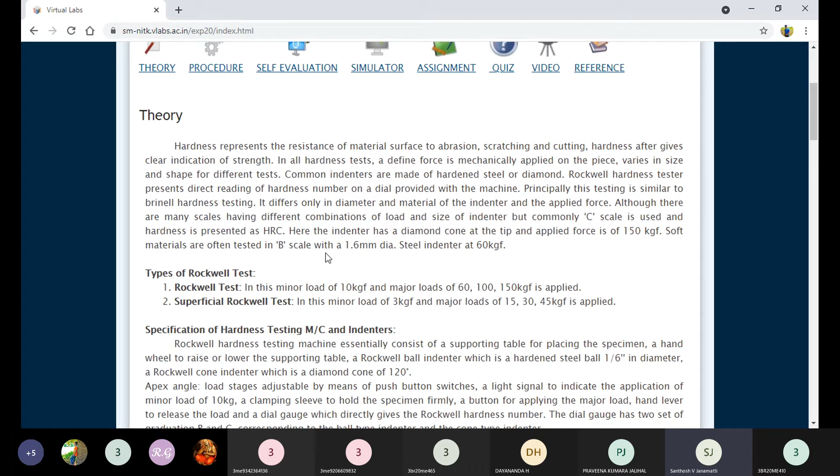Yesterday I defined hardness as the ability of the material to resist indentation or penetration, in other words, the ability to resist scratching, cutting, or flaws on the surface. If a material is very hard, it will not allow easy scratches, penetration, or indentation on the surface. Hence we call it a hard material.

The best examples for hard materials are stainless steel, 18-8 steel, and high speed steels. Some other harder materials are there too. For example, some ceramic materials have excellent hardness properties. So all these are examples of hardness materials.

Be careful, note this in your book, this is very important for the Viva. You can give examples of hard materials. Most ceramic materials are best examples for hardness, such as aluminum oxide, boron, tungsten carbide, boron carbide, and cuprous oxide.

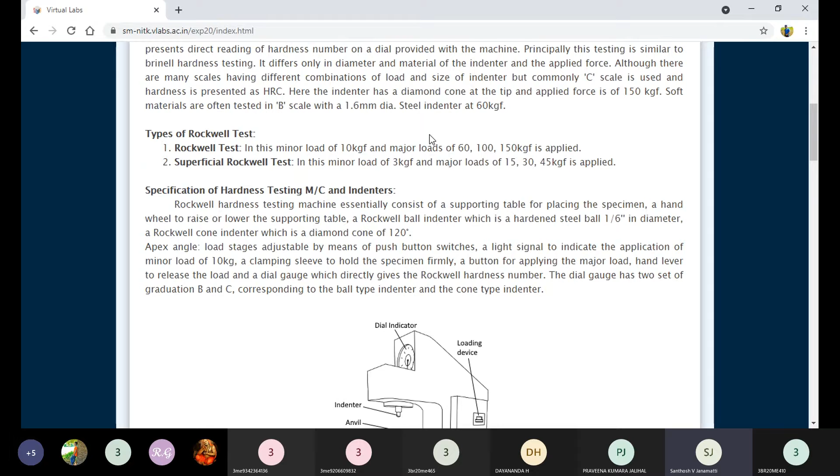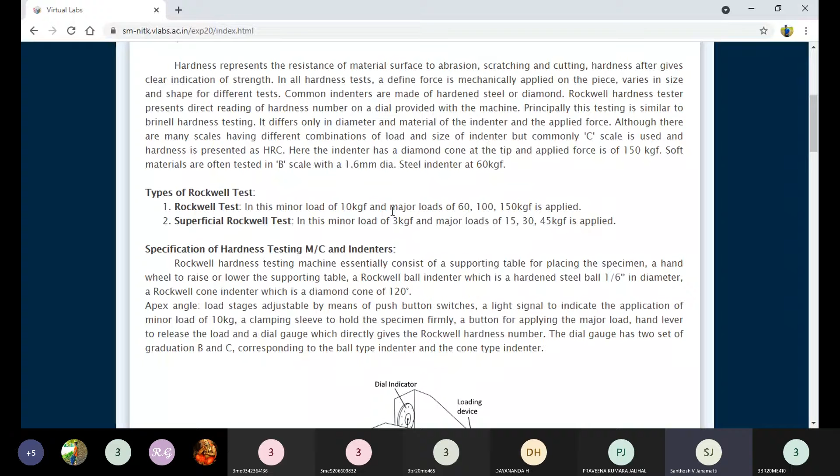Today we are planning to conduct one experiment, so while discussing the procedure, I will explain everything - what will be the minor load, what is the major load, and everything we will discuss.

So the specifications of this, we can call it our Rockwell hardness machine. As we can see, the image is a Rockwell hardness machine. Here we have a chart. This is a very important thing. Now I am focusing on these scales.

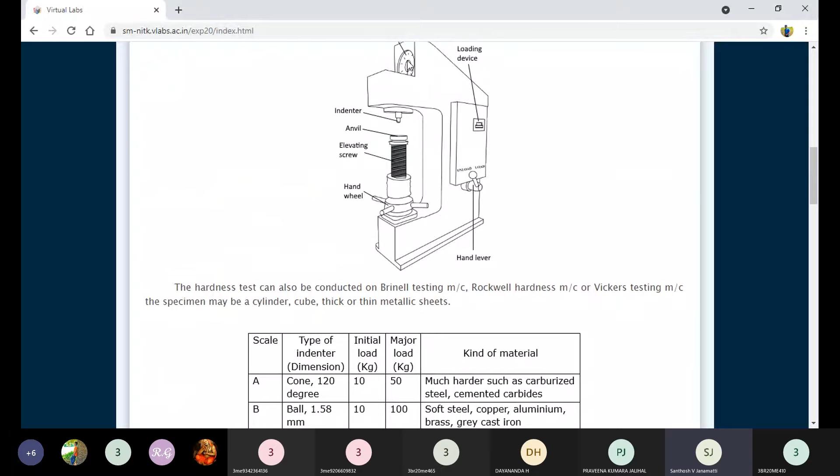So here we have a dial indicator, keep this in mind, while discussing the procedure this will be very important. Meanwhile we should understand this, it will be important in future. In this dial indicator there are three scales: A scale, B scale, and C scale.

So what do they indicate? There are three different scales in the dial indicator. If the A scale is selected, A indicates the type of indenter - meaning the dimension of the indenter based upon the material. So here I will go one by one.

So for the A scale, A indicates the dimension or type of indenter, and it also indicates the load - both minor load and major load - for that particular kind of material. A specifies these types of materials.

Which materials are those? Much harder materials, such as carburized steel and cemented carbides, as well as some ceramic materials. If you want to determine the hardness value of carbide materials, you should focus only on scale A, because this dial has three different scales.

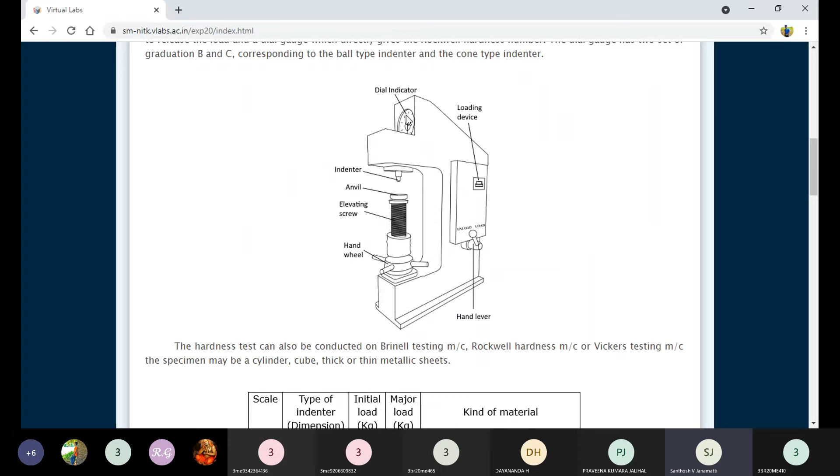If you are using carbide or harder materials, you need to take the type of indenter with respect to the material, because scale A indicates a cone type indenter, or sometimes diamond type indenter, with an apex angle of 120 degrees. The initial load, meaning minor load, should be 10 kg, and major load should be 50 kg. You have to follow all these parameters if your material is a harder material.

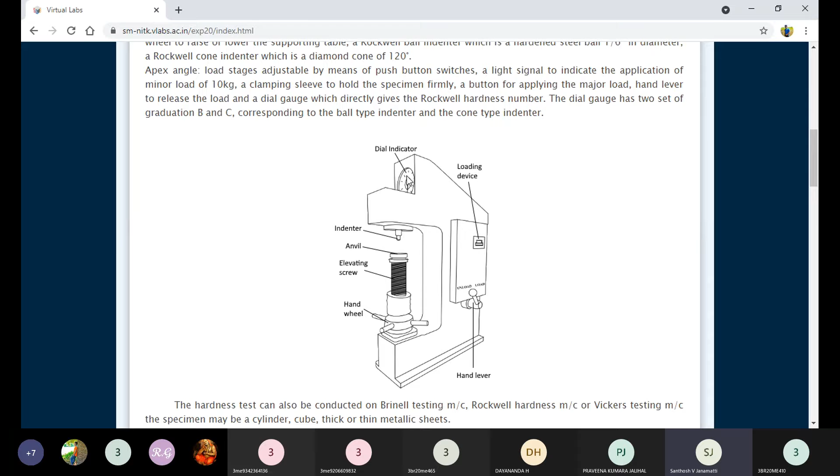You can note down the readings only for the scale present, whether it's A, B, or C. Least bother about the other scales. Your focus is only on that particular scale because of the material. Hope you understand—keep this in mind.

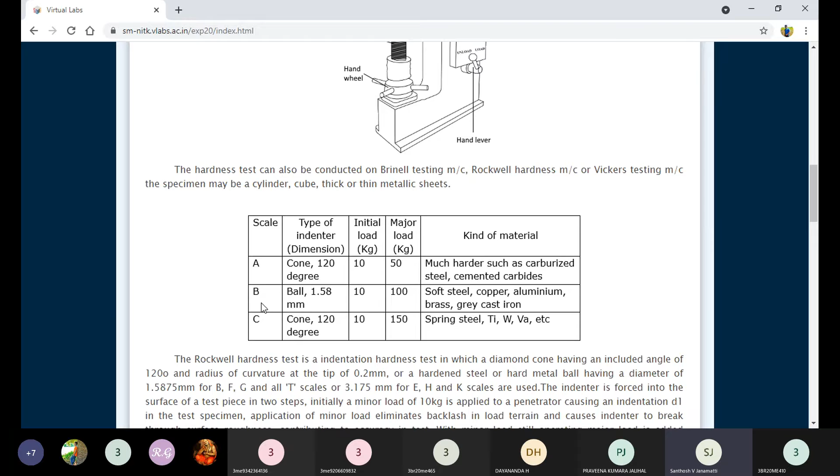Coming to the B scale—what does it indicate? B stands for Ball indenter, meaning the type of indenter is spherical in shape, unlike the cone or diamond type. The ball diameter will be approximately 1.58 mm, though sometimes we use 2 mm diameter balls for conducting the experiment. The initial load is 10 kg, but the major load is 100 kg.

What kind of materials can we use here? If you get aluminum, soft steel, copper, brass, or gray cast iron, all these are medium hard, ductile materials—most commonly these are ductile. These have medium strength, not very high, and are medium hard materials.

Hence for these materials we select the B scale. We use the ball indenter, with initial load of 10 kg force and major load of 100 kg force.

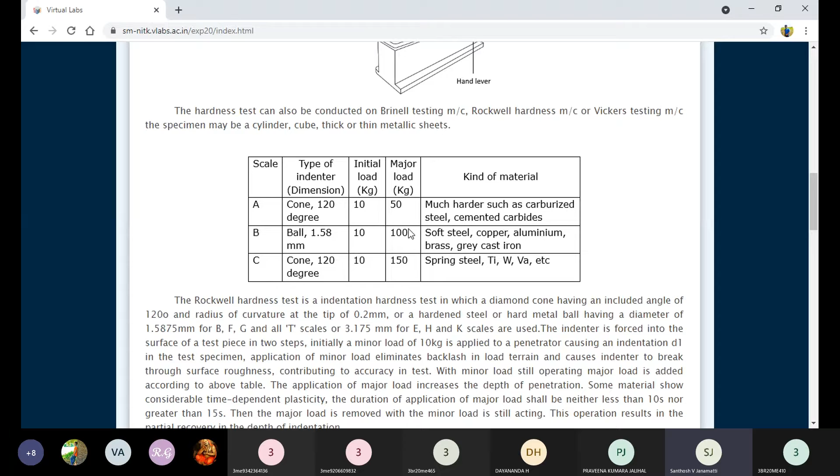Now coming to the C scale. The cone indenter has a 120 degree angle. The initial load is again 10 kg, but the major load is 150 kg.

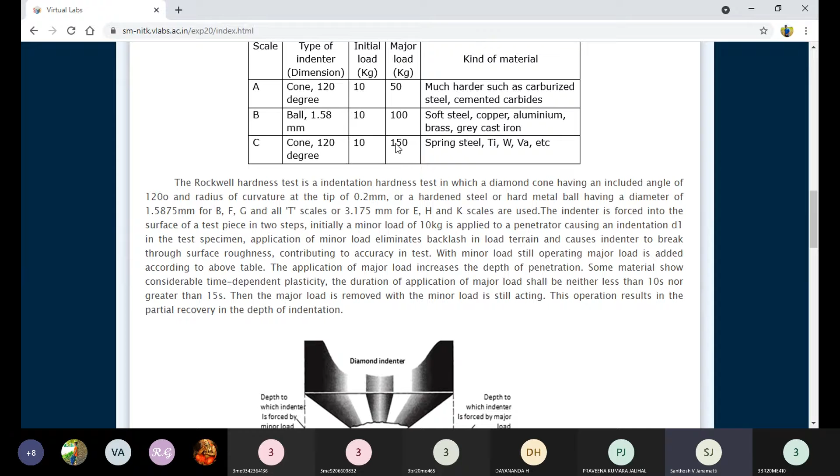What kind of materials do we use here? Much harder materials. Spring steel is one example—these are most commonly alloy steels, high carbon or high alloyed steel. Spring steel definitely has high strength and high hardness.

Other materials include titanium, tungsten, vanadium, and other alloying elements. If your steel or any other alloying material needs hardness determination, you go through the C scale.

This is very important basic information you should know while conducting this experiment. When sitting in front of examiners during vivas, such questions may arise, so you must have the capability to answer. I hope you understand these things.

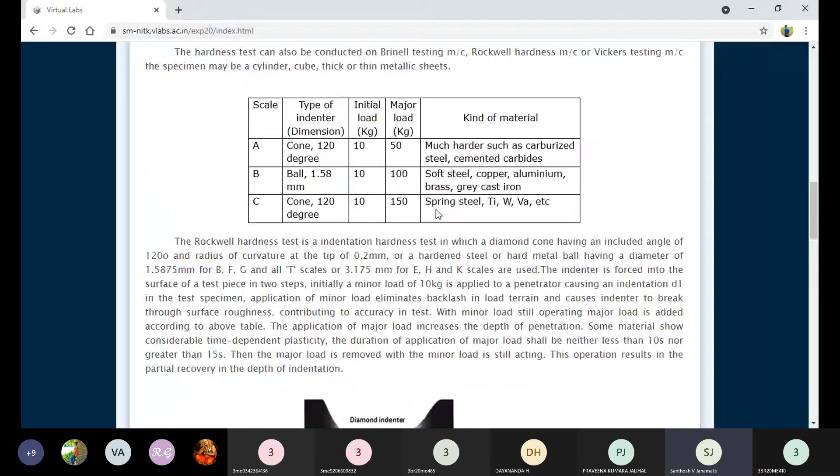Now I'll show you about the indenter. This is one kind of indenter—a cone type, or diamond shape indenter. We can call it a diamond shape indenter.

The minor load indents only up to a certain portion of the surface, just entering into the workpiece. Above and below there are two hash lines visible. The first hash layer is dug into the material when we apply the minor load.

The second hash portion occurs when we apply the major load. This is for understanding how the forces work—this is the first force and this is the second force.

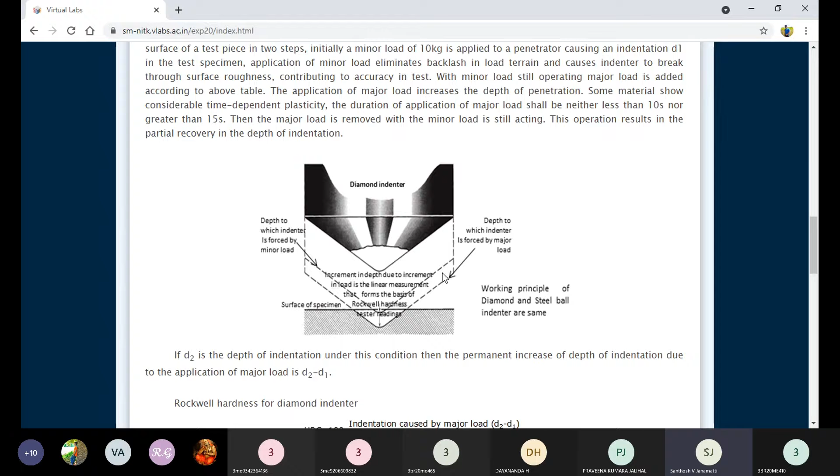With this force we compress or press the indenter into the workpiece until we get the indentation or print over that particular sample. Once we get a perfect impression on the workpiece, we stop and note down the reading. I will explain everything—so coming to that.

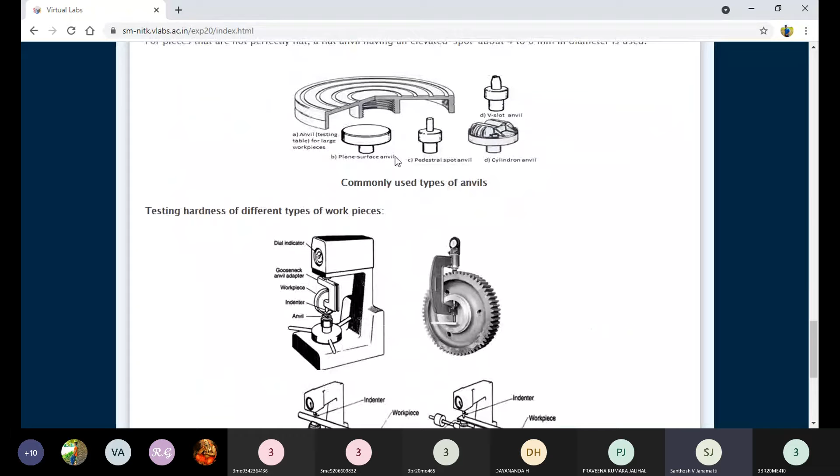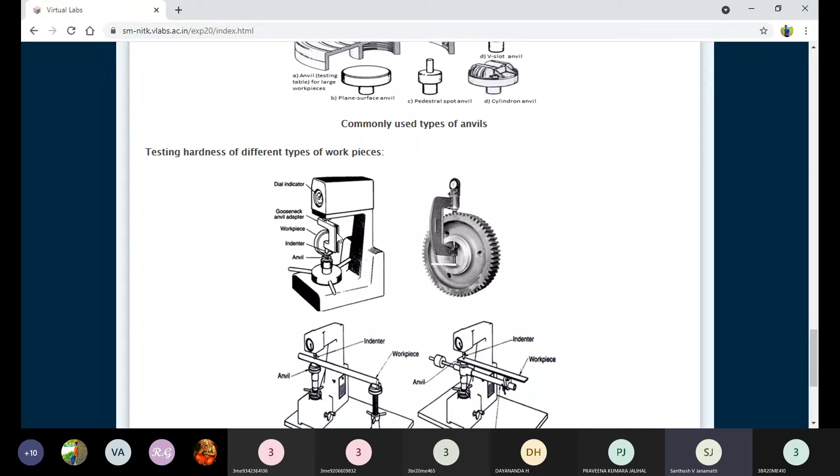This is the arrangement of your Rockwell hardness machine, and here we can see the different types of pieces, different dismantled parts, or different machine elements which combine together to form the machine.

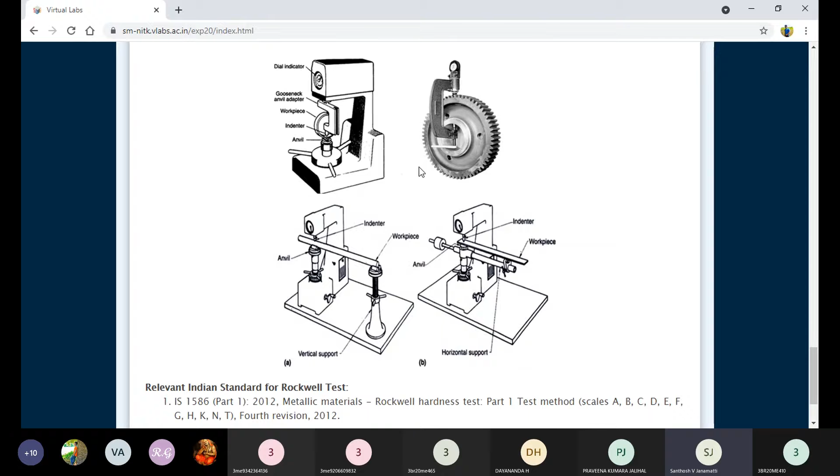So here we have different types of anvils. This is one type of the anvil. We can easily rotate this screw or screw handle to raise the anvil. This is one type, and this is another type. We can rotate this hand wheel to raise the anvil.

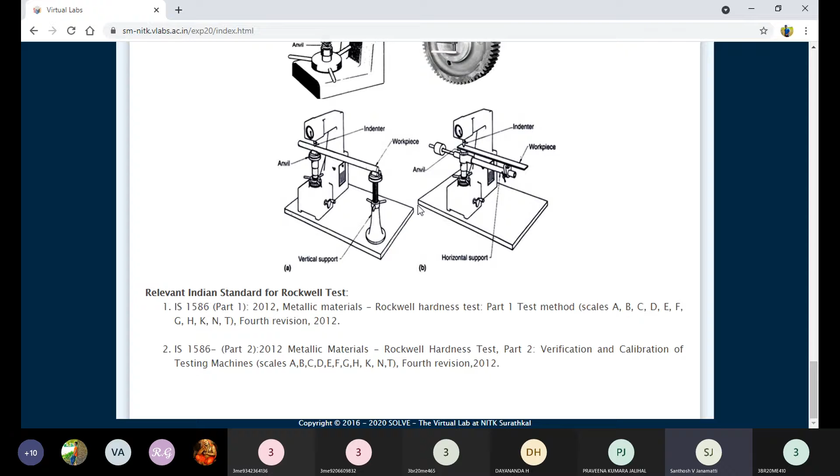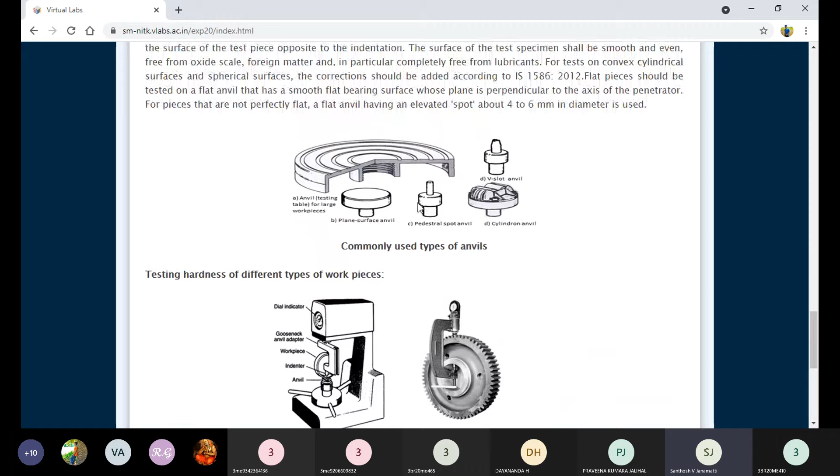This is one more type of the machine. There are different hand wheels or different anvils we can see here because of different applications and different situations. We can select these kinds of machines based on that, right? I hope you understand this. This is about all these things that come under the theory part.

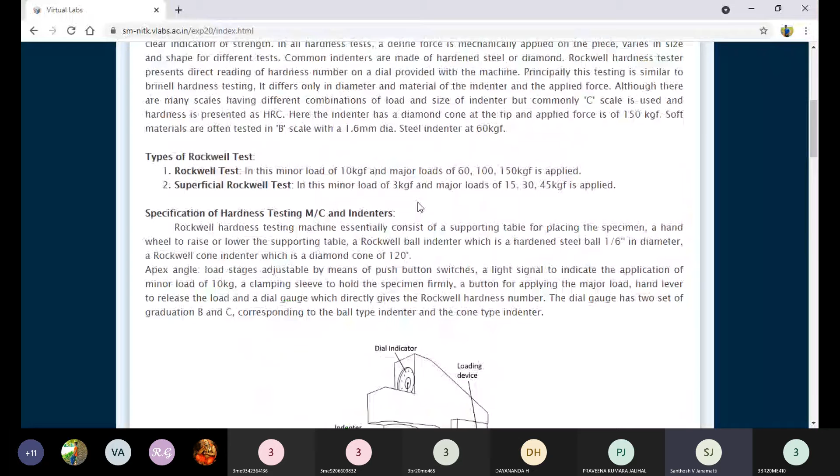Yes, any doubts? Shall we start the procedure? Shall we move? Hello, are you there? Yes.

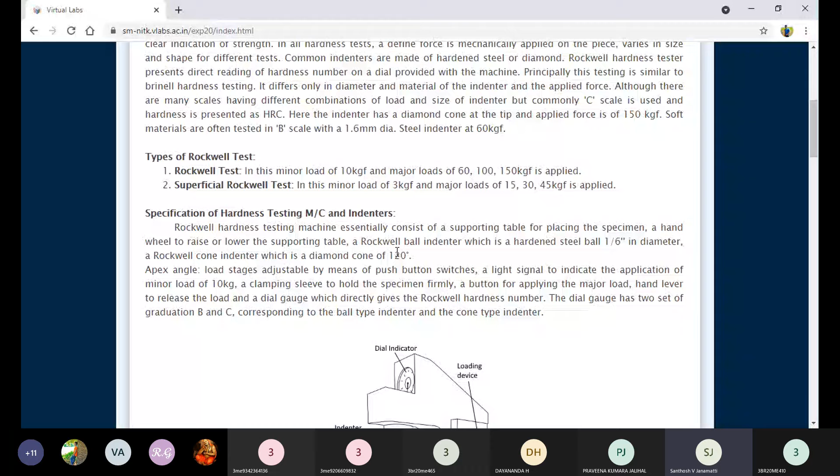Okay, this is only the theory part. Now we will focus on the procedure. The theory part is over. So the things we need to understand, I explained to you, so that it's better for understanding the experiment. Now I'm coming to the procedure.

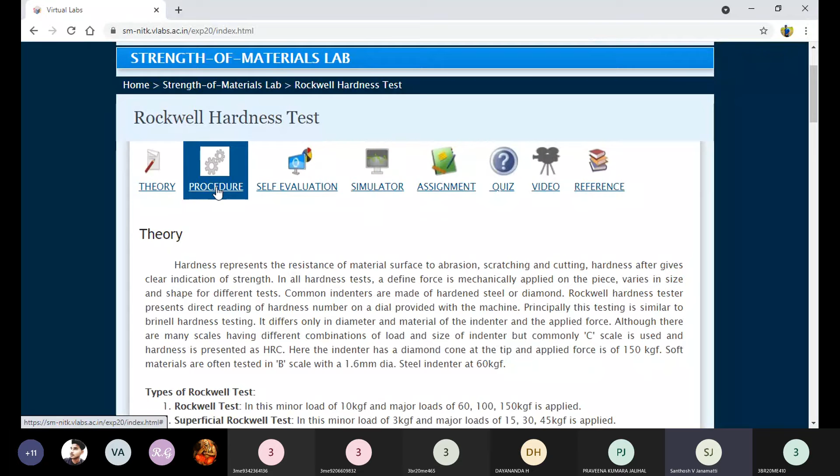See here, there is a procedure for how to conduct the hardness test. Aim - I will start from the aim. The aim is to find the Rockwell hardness number of mild steel, cast iron, brass, aluminum, and spring steel. So for any one of the materials, we need to determine the hardness value.

In other words, you can also say the aim is to determine the hardness number of the given sample. The given sample may sometimes be mild steel, cast iron, brass, aluminum, or spring steel. In practice lab, we take all these different kinds of materials, so we need practice with different samples. In the examination, out of these materials, you can get any one, and you need to perform the test on that particular selected material.

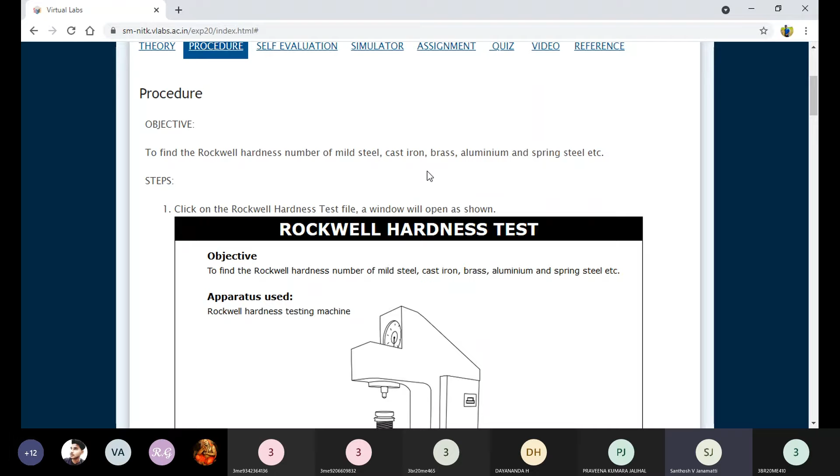This is the aim. Now, step one - I will show you what step one is. Okay, right.

Before going to step one, I will show you the machine. This is the apparatus, which we can call the Rockwell hardness testing machine. Here we have an anvil - this is the anvil. This is the hand lever, this is the screw, and this is the platform or anvil platform.

This is the hand wheel. Once we start rotating it clockwise, the screw will rise, and then it will touch the indenter. Here this is the indenter holder - this portion is the indenter holder. At the tip, we need to fix the indenter. This is the indenter holder, and this will be the indenter. The indenters have already been discussed - different types are available.

Based on the type of material, we need to select the indenter. Indenters are available in different shapes and dimensions. Depending on the material, sometimes it's a diamond shape, sometimes a ball shape. If it's diamond shaped, you look at their angles. If it's ball shaped, you look at their dimensions or diameters - 1.58, already discussed, or 2, sometimes 2.5 - these diameters are available. Based on the material, you can select.

You can fix it into the indenter holder, and this is the dial gauge. Here we have three different scales. This is the load unit - here we need to set the loads. Different loads are available, starting from 60 kg up to 150 kg force. We can set it here using this screw.

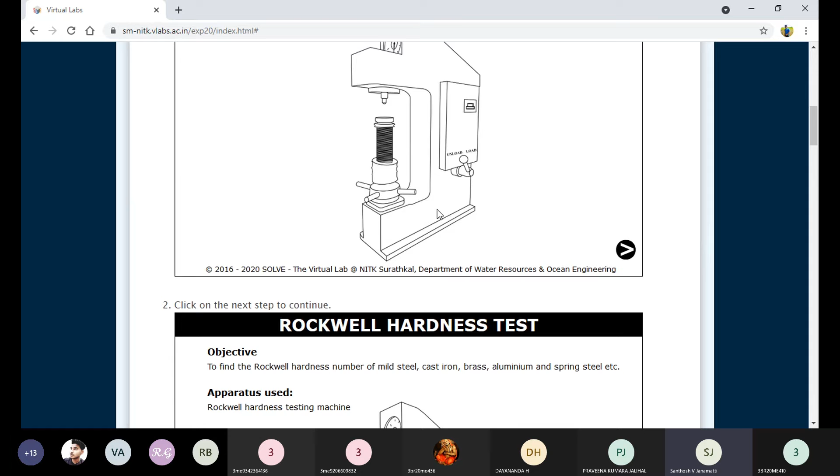After setting the load, this is the hand lever - you can load and unload with it. With the hand lever, you load this way, and this way you unload. The forward direction is unload, the backward side is load, right? Once again, I will show you the simulation of this lab also.

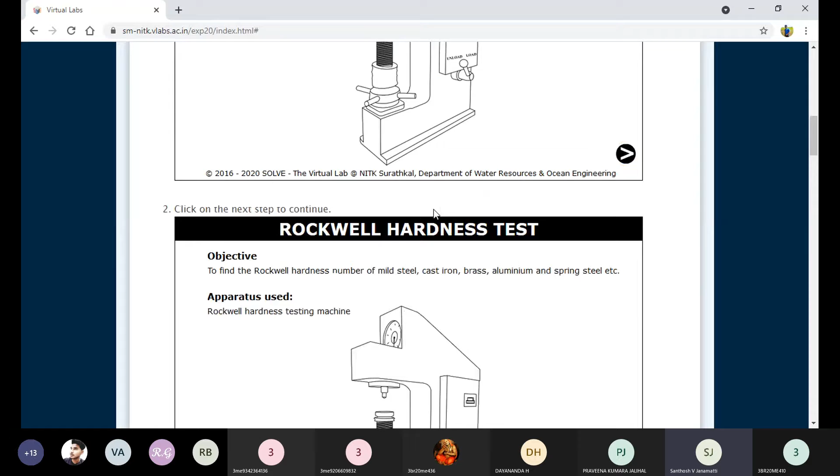Step 1. So what is step 1? This is very important. How do we conduct the experiment? It starts from the selection of the material. We can call this step 1.

Select the specimen for your choice: spring steel, cast iron, mild steel, brass, aluminum, as per your choice or as per the examiner's choice. This is cast iron, this is steel, this is spring steel, mild steel, brass, aluminum. Different types of samples are available. As per your choice or the examiner's choice, you can select the materials. This is the first step.

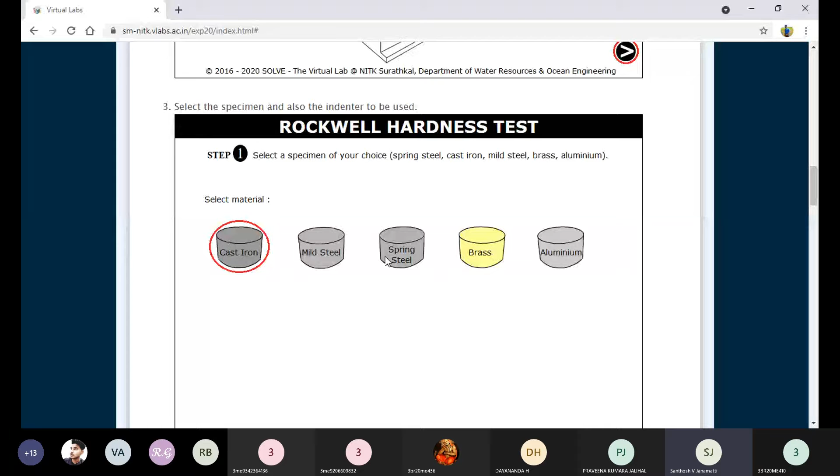Keep it in your mind. Coming to the second step. What will be the second step? The hand wheel is turned until the specimen contacts the indenter, and the pointer of the small dial gauge reaches the red dot, so that the minor load of 10 kg is applied.

I will explain what it is. In step 2, once you select the raw material or given sample, whether it is aluminum, mild steel, spring steel, or cast iron, once selection is over, you need to select the parameters before coming to the machine.

You need to select the parameters, as I told you before: chart B, C, A. Suppose you are selecting aluminum material, what kind of scale do we need to focus on? Tell me.

If it is aluminum samples, now we are coming in front of the machine. What kind of scale do we need to focus on? If it is aluminum, tell me, come on, quickly, otherwise this will be a waste of time. B, sir. B, 100%, 100%, 100%.

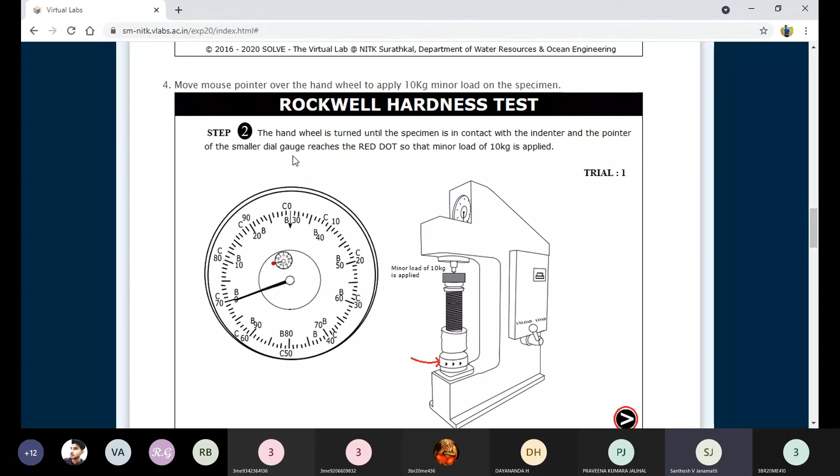Yes, right, now it is over. Now we are selecting. Here something is written: red dot. We see that dial gauge reaches the red dot. Here I will magnify the image of the dial indicator. Here we have the dial indicator. Now I am magnifying that dial indicator here.

Here you can see scale C, scale B, right? Sometimes we call it scale A. Sometimes one more scale is available, but for most applications and most machines, depending on the machine, sometimes it has all 3 scales, sometimes only 2 scales, B and C. Here we have a B and C scale.

The red dot: here we have one more small dial. Inside that big dial we have one more small dial, as you can see here. This is the small dial. Here we have a red dot. Now we are selecting the materials and every parameter.

Later you can keep the sample upon the anvil. Once you keep your sample upon the anvil, then you can select the indenter, which we have already selected. Now we just need to fix it into the indenter holder. Now we are selecting the indenter or penetrator. Our penetrator is now set into the penetrator holder.

Let's start performing. Once you keep the sample upon the anvil, you can start. Everything is now set. Now you can start rotating the anvil in a clockwise direction. This screw will rise up and the platform also rises up, just until it touches the workpiece. The surface of the workpiece touches the indenter.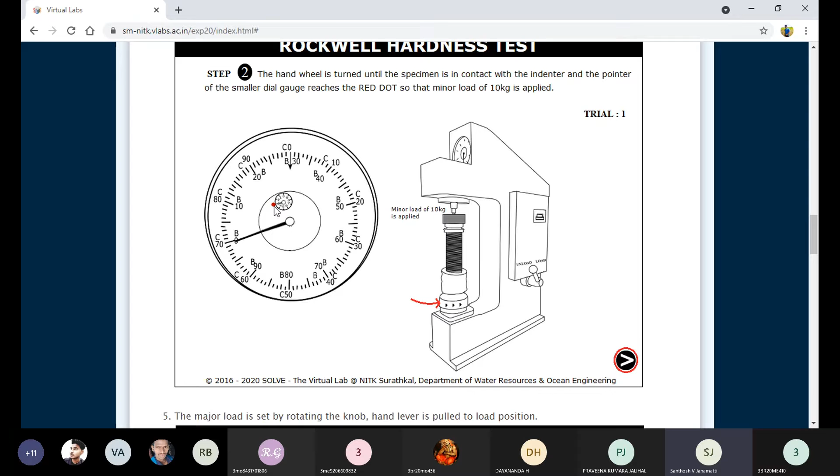Okay, now next level. This is step 2. Coming to step 3, yes, this is where we make sure the small pointer touches the red dot, and also that the surface of both the indenter surface and workpiece surface will be close in contact.

Now you can select the loads. Here we need to apply... Now already we have applied the minor load. Now we need to apply the major loads. Minor load, definitely, I hope you understand.

Definitely, sure it is. The examiner will be asking what you mean by minor load, what you mean by major load. I hope you understand what minor load is, where you can get the minor load, how you can apply the minor load. You need to understand. Coming to the second step, now we need to apply the major load, right?

So how can we apply the major load, sir? Yes, as per the types of materials, you have already selected the loads, whether it is 100 kg, 150 kg or 50 kg. Based upon the type of material, we have already selected these parameters. Now we need to set it, that's it.

So here there will be the arrangement. Yes, here we can see the arrangements of the loads. The loads are 150, 200, 250, 300 up to, there will be load setters with the help of the button. So you can set the loads. That I will show you in a simulation.

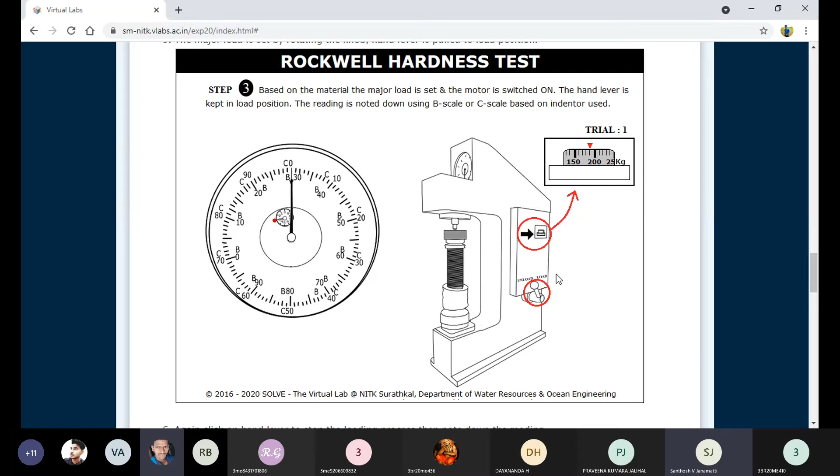Step 3 already I have explained. Now once you load it, once we pull back this lever, what happens? There will be movement of the dial indicator. The indicator in the dial will start moving, rotating over the dial. It will be rotating like this, right?

Rotating like this, as we can see here. Then you can unload it. Here we are, the red circle indicates: click on the hand lever to unload it.

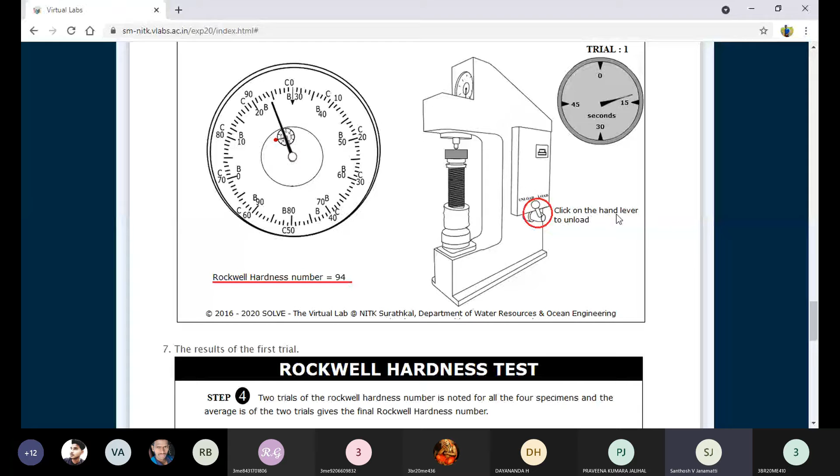One thing you should remember, while loading you don't take the readings. While loading also, this pointer will be rotating, and that will stay after some time at a particular point, right? You don't take that value because that is in load condition.

So we can wait for a few seconds, maybe 10 to 15 seconds, in load condition. You don't take any values. After 15, 20 or 30 seconds, again we can unload it. Just we can pull forward.

Initially we pull back, this is the load condition. Now we can make sure that the lever is in unload condition. When we put this in unload condition, again this pointer starts rotating.

Wait for 20 to 30 seconds. This we can call the steady time. Some people are in a hurry, and while this pointer is still moving or fluctuating here and there, they take values. Don't do that. Give sufficient time for the pointer to stop at a particular point. That is the steady state of the pointer, which we call steady time.

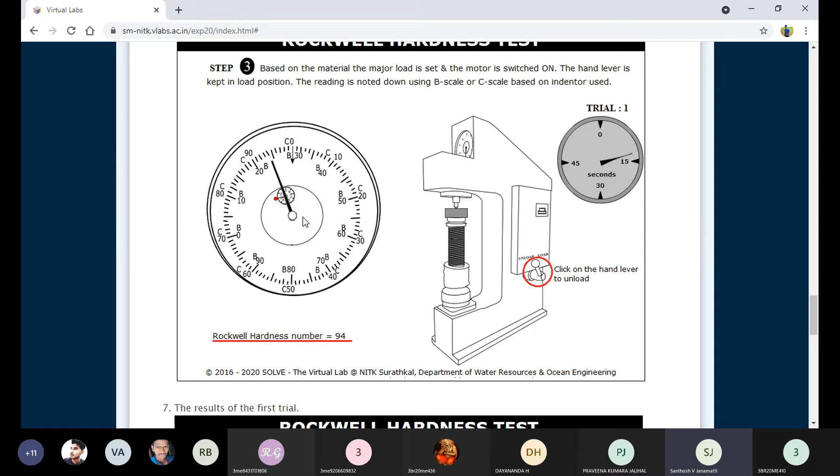Okay, so this is the post step. Then cast iron is B, so 94, right? Material cast iron, total kg 100, already we have discussed. This is the chart. Material cast iron we are selecting, so total kg is 100. The scale is B we are using. Rockwell, see here RHN - sometimes they write RHB instead of N, which means which scale we are using. 32 we will get.

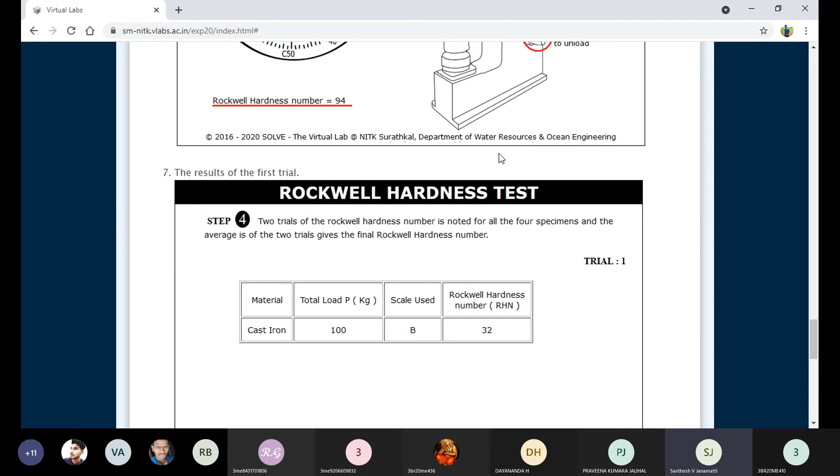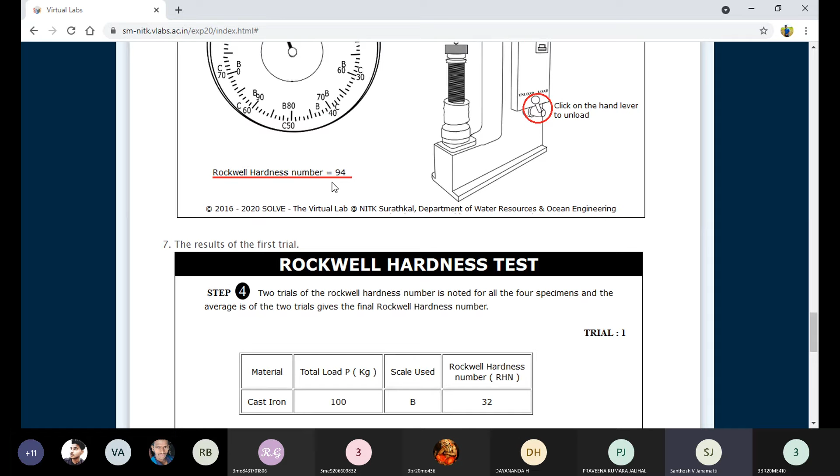This is the first trial, we are able to get 32. The number of trials which we can take—second time, here they are showing 94. So how we are conducting the number of times that we will get the different values. No issue with that.

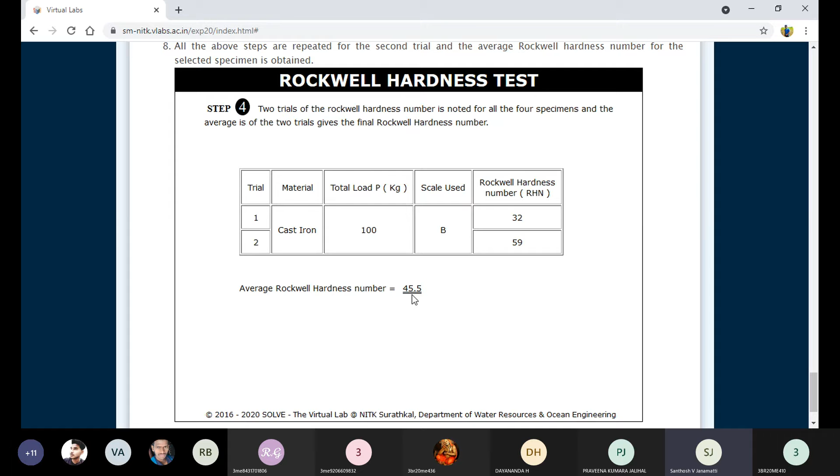Now we are getting the hardness number for the cast iron as 32. Second trial we are getting the hardness number 59. Then we need to take 2 or 3 trials, depending upon your convenient time. You can take 2 or 3 trials because we want the average value of the hardness number of the given sample. Here they are taking 2 readings: one is 32 first trial, second trial is 59. The average of these two we will get 45.5. This is the average Rockwell hardness number. Always we need to determine the average value of the hardness number.

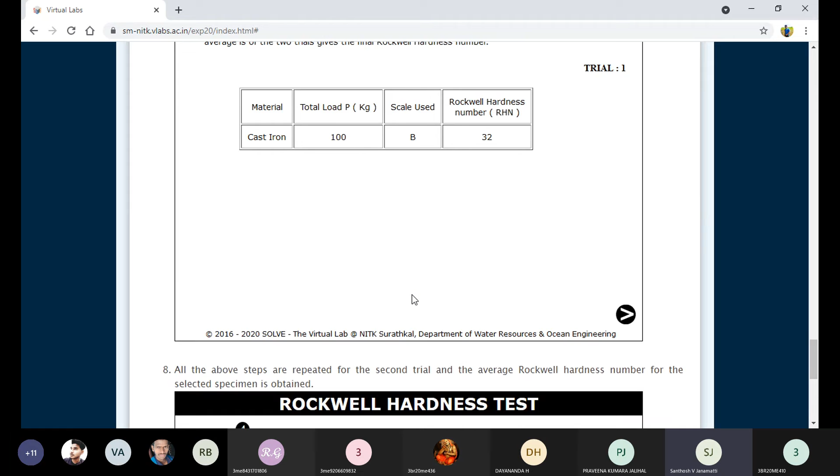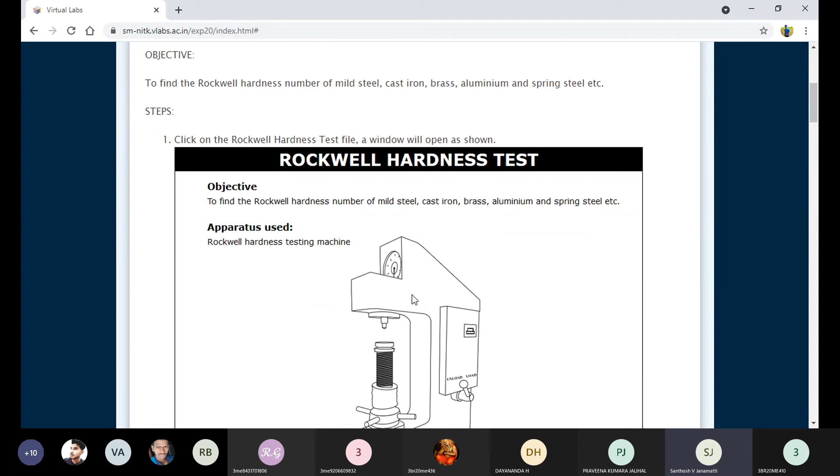I hope you understand this. There are only simple 4 steps which we can use to get the hardness value of the given sample. Any doubts regarding this? I hope you understand the procedure, right? This is a very simple experiment, there is no calculation, nothing else.

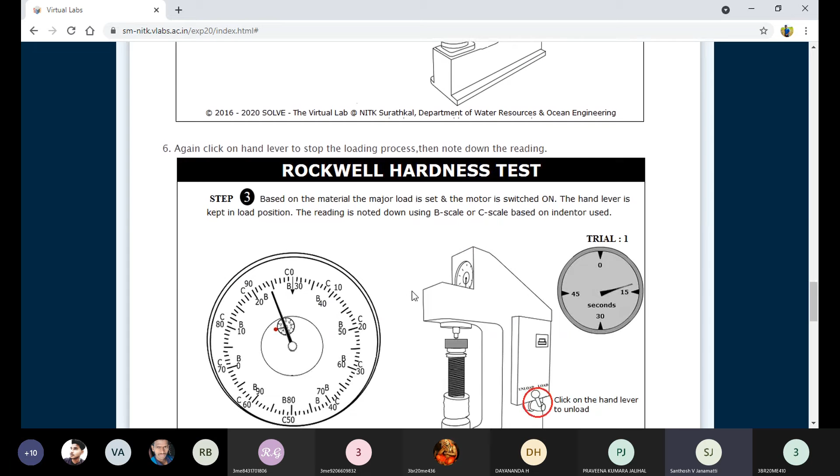After that, you need to write the procedure. Note the procedure, and you have to write it down. After the procedure, we need to draw the tabular column, and finally you need to write the results. I hope you understand this procedure, right?

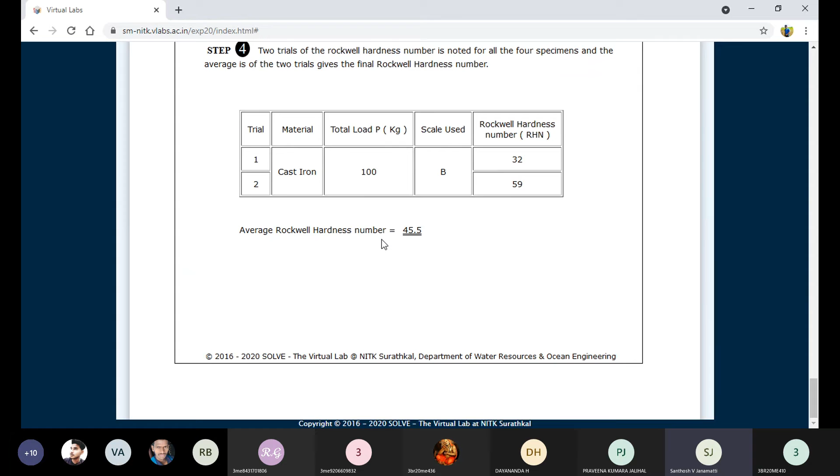So now I will take you into the simulation. I am trying to show you the simulation so that you can understand better how this experiment is carried out.

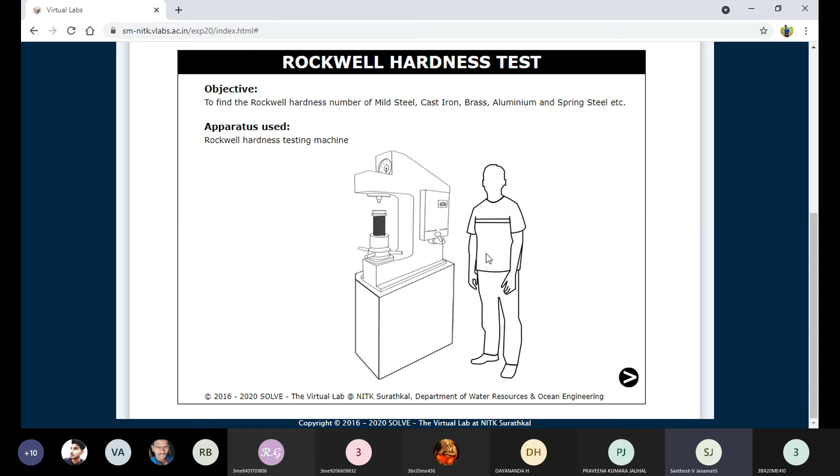Okay, simulation. The first step of the simulation here we can see. Here the instructor, or any student, is now ready to conduct this experiment. This is our hardness testing machine. So here that person has carried out the experiment, right? Now this is the simulation.

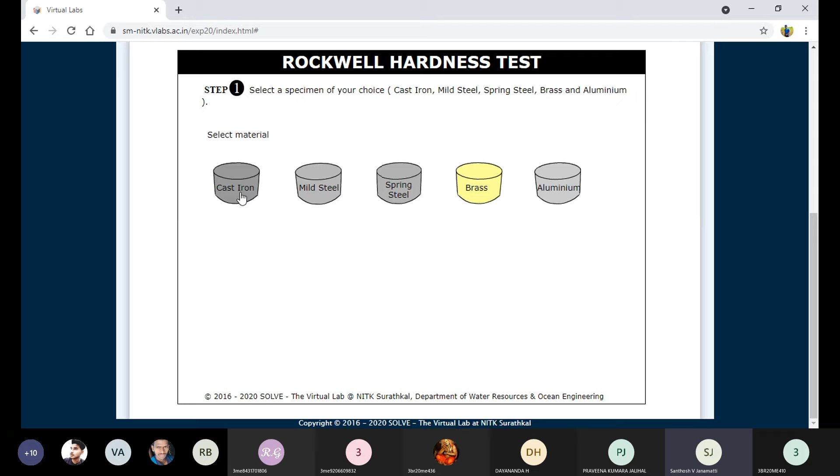Now here we have types of materials: cast iron, mild steel, spring steel, brass, aluminum. If you click on cast iron, you can see what kind of indenter we need to select, that will be shown here. Once I click onto the cast iron material, we get the type of indenter—it is a ball indenter. Or if you click the mild steel material, again it will show the ball indenter. You can go back to the chart. In cast iron also we need to choose the ball indenter, and in mild steel also we need to choose the ball indenter. If it is spring steel, the indenter will be changed.

This is the cone type indenter, or diamond shaped indenter. Cast iron also ball indenter, mild steel also ball indenter. If it is spring steel, then the indenter will be changed. Again brass, soft ball indenter. Again aluminum, same ball indenter. Hope you understand this.

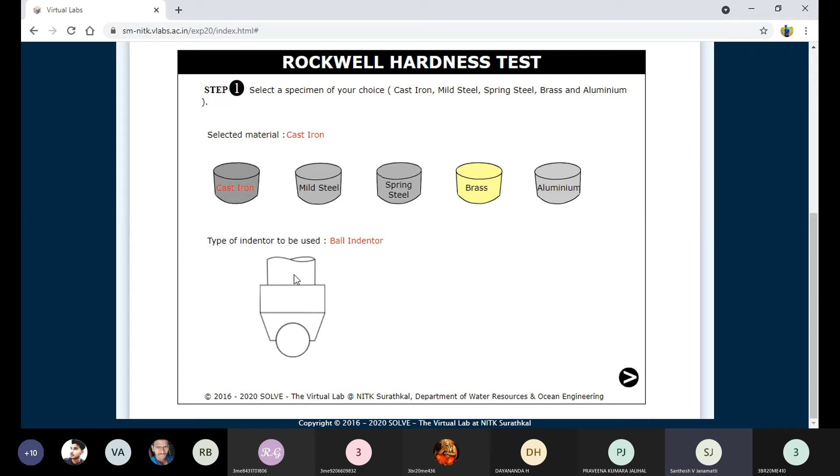Yes sir, yes. So as you change the materials, the indenter will be changed. This is what I can show you through the simulation lab. Next we will go next.

At this stage you don't take the readings. This will show some values, but you don't take these values because it is still in load condition. This is the seconds—this is the steady time. How much can we wait, sir? Some people are in a hurry, they immediately unload it. No, you don't unload immediately—wait for this time.

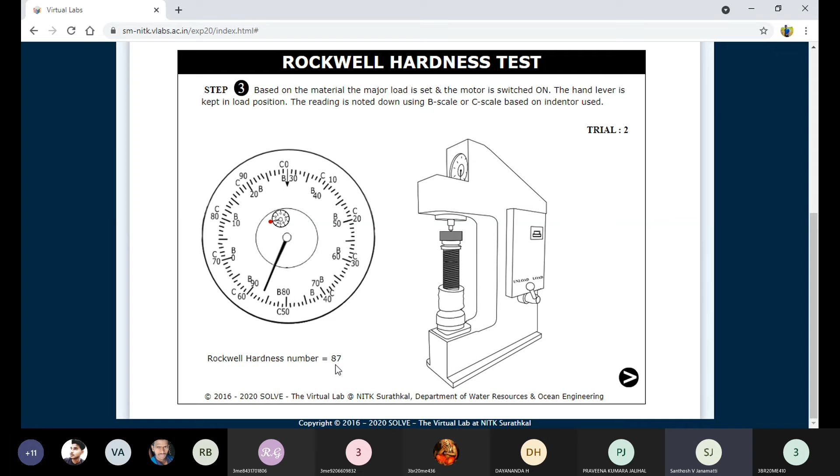Now what will be the next? Yes, now directly we can get the average value of the Rockwell hardness number. The first trial we got 71, and second trial we got 87. The average of 71 and 87 - so here the average hardness number of the given sample is around 79. Exactly 79 is the hardness value of the cast iron.

Hope you understand.

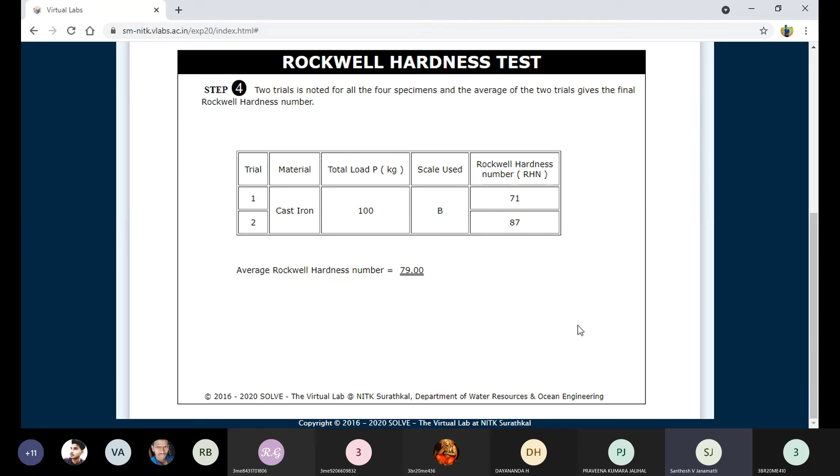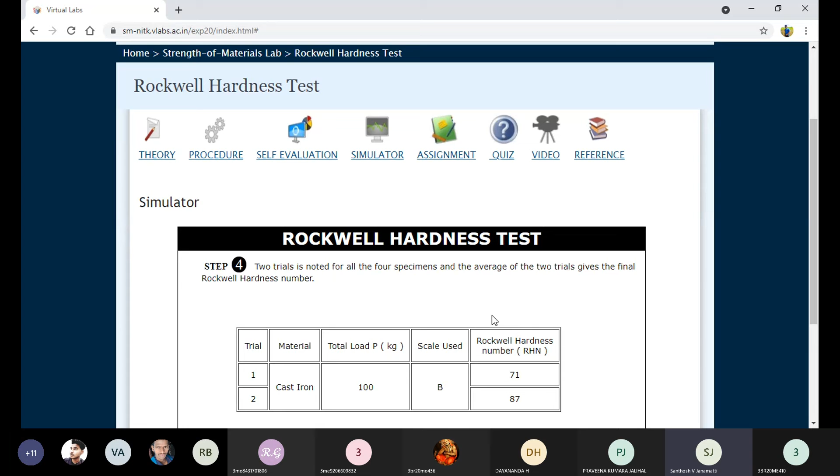So, how to set the minor load, how to set the major load, how to raise the anvil, and how to take the values, right? What will be the minor load, what will be the major load, and what will be the dwell time, what does the red indication mean, what is the importance of red indications - everything you should be able to explain. And what will be the B scale and what will be the C scale, how will you select the B scale and C scale, how will you select the indenter load, right? Hope you understand these things.

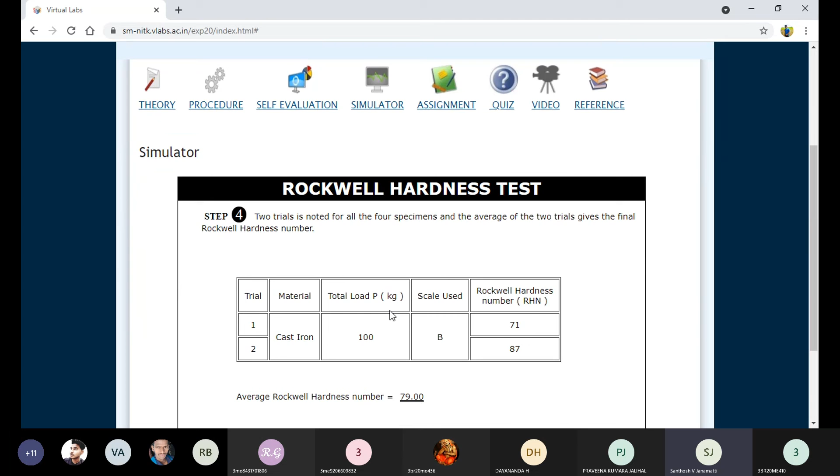Yes sir, yes. So this is the assignment. You can take the snapshot or you can write it down. These are the assignments, so you can practice this assignment. Why is it necessary to do the hardness test? Now I'm giving you these questions - they are very important for your external viva questions. Note these questions, definitely this will be in the internal and external exams.

So what is necessary to do the hardness test? Second question: describe the procedure for the Rockwell test and explain the reason for the minor load. What are the materials generally used for the indenter? Different indenters use different materials, which you should be able to elaborate on.

What precautions should be taken before conducting the experiment? Only small precautions are needed. Sometimes people wear gloves, but there's no need for gloves. We just need to take safety measures like wearing shoes. It's not a big issue.

And what is the principle involved in the Rockwell hardness test? This is where self evaluation comes in. If you want to evaluate yourselves on how well you understand this process and procedure, that's what self evaluation means. You can answer me; we'll ask you some questions.

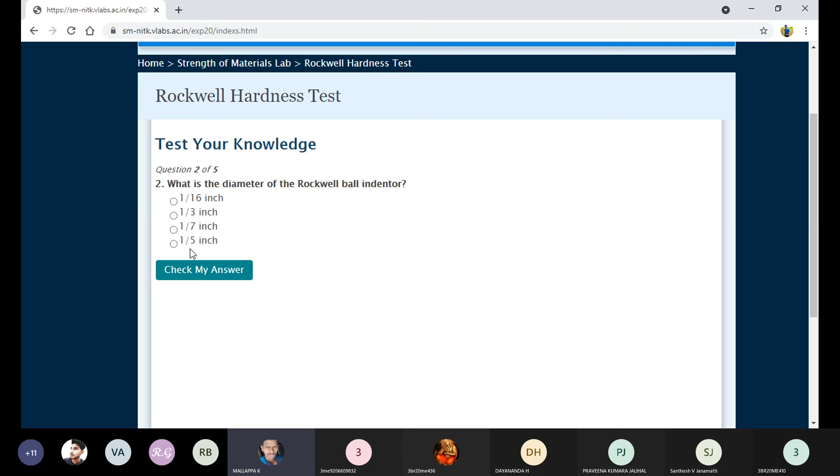Which one should I choose? 1 by 7, 1 by 3, or 1 by 16? Let's see, now I will take 1 by 16 inch. We will check whether it is right or wrong. Yes, it is the right answer.

Keep in mind, 1 by 16 inch and 1 by 8 inch are most commonly used, because you can convert them. We will get 1.58 mm, or approximately 2 mm, from converting 1 by 16 and 1 by 8 inch. We will get more than or nearly equal to 2 mm.

Next question: the load applied for the Rockwell C test is more than the Rockwell B test. True or false? False, false. Okay, we will take false. Wrong, it is true, sir. It is true.

Why is the minor load initially applied in a Rockwell hardness test? This is very important, I told you this already. Options: the specimen cannot bear the major load; to distribute the load acting on the specimen and firmly seat the penetrator into position for the major load; or none of the above.

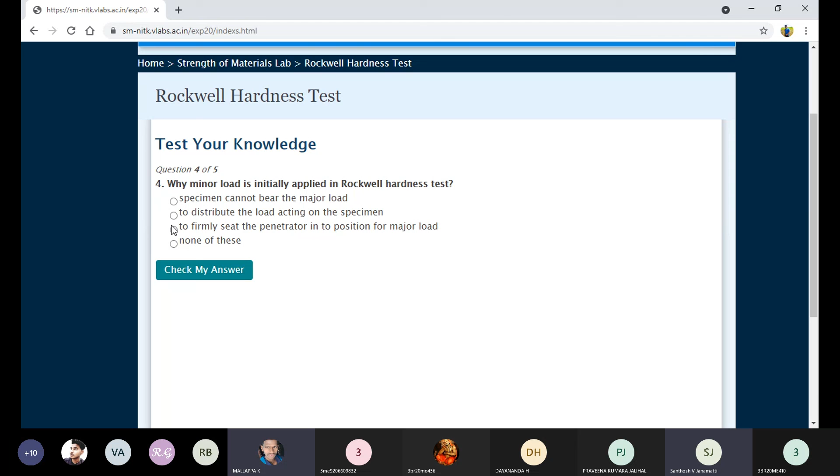B: to distribute the load acting on the specimen. Shall I take this one? Don't worry, we will get the correct answer. Shall I take the third one? Yes sir, this one. Anyway, we will get the answer. Third one, it's okay. Third one is the right answer.

Okay, next question: what is the unit of the Rockwell hardness number? Anybody? Dimensionless number. Dimensionless, yes, 100% right answer. Let's go to the next.

Now see your score. So we all together answered 3 out of 5 questions correctly.

Okay, now the time is around 3. Tomorrow we'll discuss the second experiment, the Brinell hardness test. Brinell test is also for determination of hardness, because there are 3 hardness machines and methods for determining the hardness number of engineering materials. All three machines are very important because each has its own perspective, so we can use all three experiments to determine different engineering materials. Tomorrow we will discuss the Brinell hardness test and how it works. Everything will be covered in tomorrow's class. Now I will wind up this class.